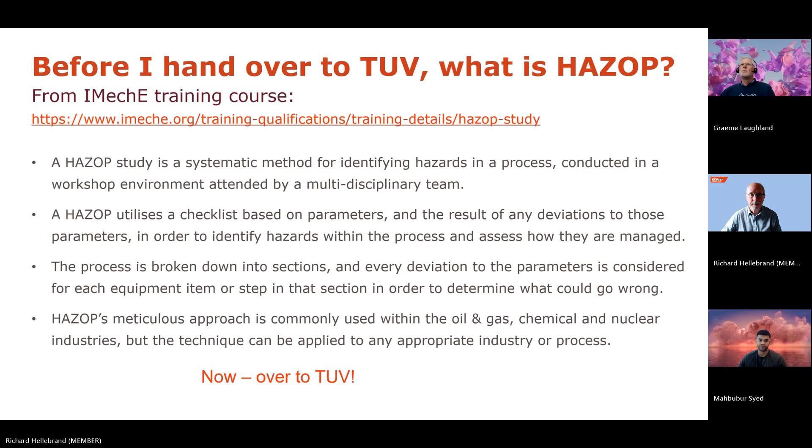I will cover the first part of the presentation. My colleague Mahbubur will cover the latter part. So who are these guys, I hear you ask? Well, I am a chemical engineer by background and a fellow of the Institution of Chemical Engineers. I am a professional process safety engineer as accredited by the IChemE. And that's probably best described as being akin to being chartered in the field of process safety.

I've worked full-time in process safety since the early 1990s. I've worked for 22 years at chemical sites, and these were always upper tier COMAH sites. I worked for 11 years at the Nylon Intermediate site at Wilton on Teesside, a facility very similar to Flixborough. Now, the Flixborough disaster was a major incident which occurred in 1974 and was a significant influence on the development of the Seveso Directive and today's COMAH regulations in the UK.

I've been a process safety consultant for the last 16 years of my career, and that's allowed me to get involved in a variety of industry sectors and operations, from offshore oil and gas, nuclear, petrochemicals, chemicals, pharmaceuticals, power generation, and the water industry. I led my first HAZOP study in 1989, and I've now led over 300 studies. The longest study I led was 34 weeks long, and the shortest one was less than 1 hour.

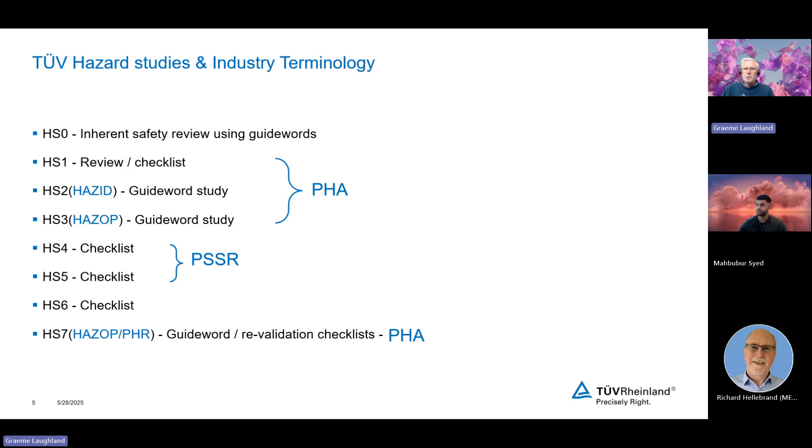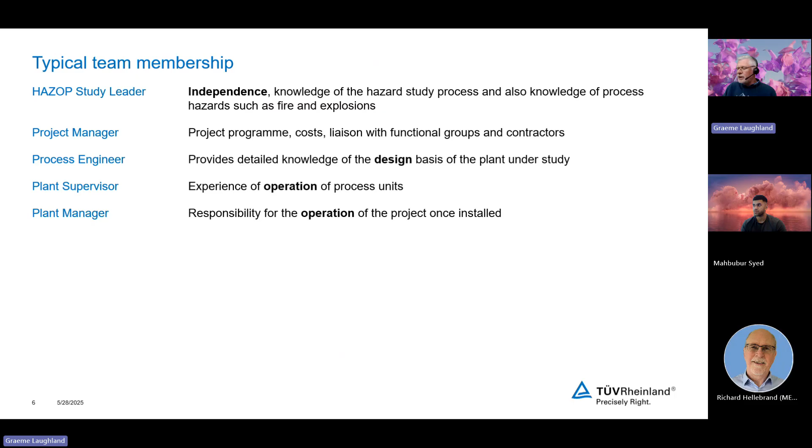So typical team membership, who gets involved, I hear you say? Well, this slide summarises typical team makeup for a project HAZOP. And it's key that the HAZOP study leader is independent from the project team. The leader not only needs to know how to apply the HAZOP methodology, but also needs to have the leadership and management skills to get the best out of the team. And believe me, if you have to do a study for 34 weeks, you've got to know your team.

In general, we need a mix of safety, design, technical, operations, and maintenance type knowledge. And as a mechanical engineer, you may be required to provide detailed information of the design basis, the maintenance requirements, and information such as the materials of construction.

Now, we can also bring in ad hoc team members. I recall conducting a one week long HAZOP with three representatives from a vendor. By the end of the week, the vendor advised that they'd learned more about their equipment in that one week of HAZOP than they'd had in the last 20 years of designing the equipment, because they learned so much from the operations and maintenance staff. So HAZOP is actually a fantastic learning opportunity.

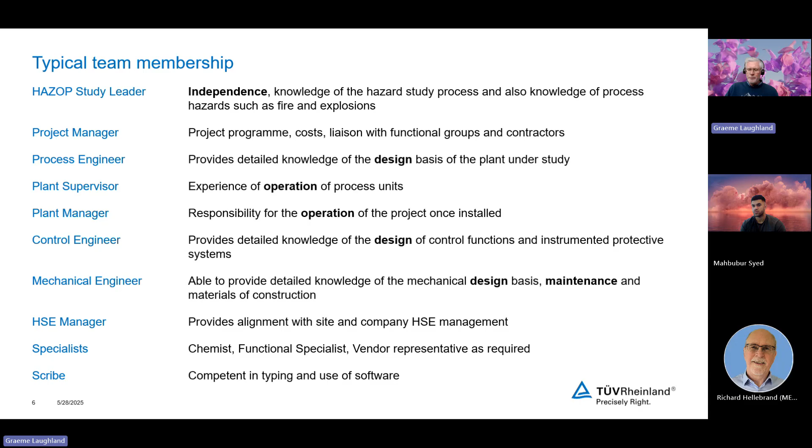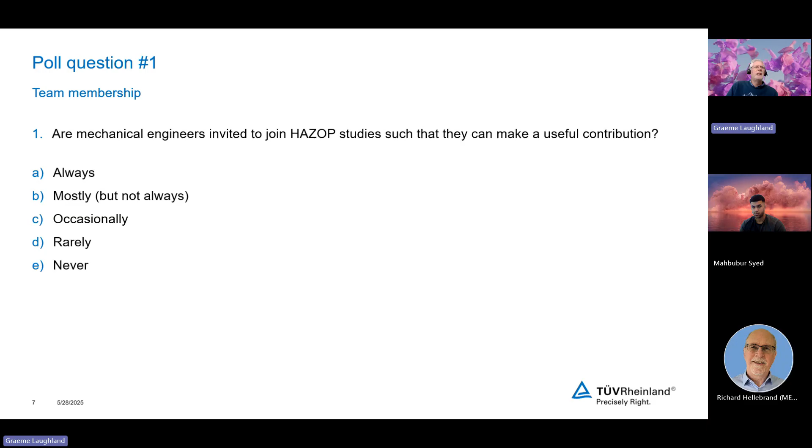Now that brings us to the first poll question. So the first question is, are mechanical engineers invited to join HAZOP studies such that they can make a useful contribution? A, always, B, mostly, but not always, C, occasionally, D, rarely, or E, never.

So I'm going to hand you back to Richard. Hopefully you can see the results there, Graeme.

Yeah. Okay, so the results have come in and they show that generally speaking, mechanical engineers are always or mostly invited to join HAZOP studies such that they can make a useful contribution. So that's around about just over 80%, 16% occasionally. So that's good news. That's the kind of response I was hoping for, actually. So that's great that we are involving people at the right stage. But however, if you're one of those who have never been involved before, put yourself forward and ask to get involved.

Okay, so back to the slides here again. So let's talk a little bit more about the methodology. What does the HAZOP methodology actually involve? Well, Graeme, I can't see your slides. Okay. Apologies for that. Yep, fine. Yeah, sorry.

Okay, so what does the HAZOP methodology involve? Well, at this point, I want to remind you that there are books written on this methodology, and I'm going to try and explain the methodology in seven key steps. First of all, we break the process into nodes. So we typically use P&IDs, break the process into manageable chunks, as we call them, into nodes, and describe the design intent and design limits of a small section of plant.

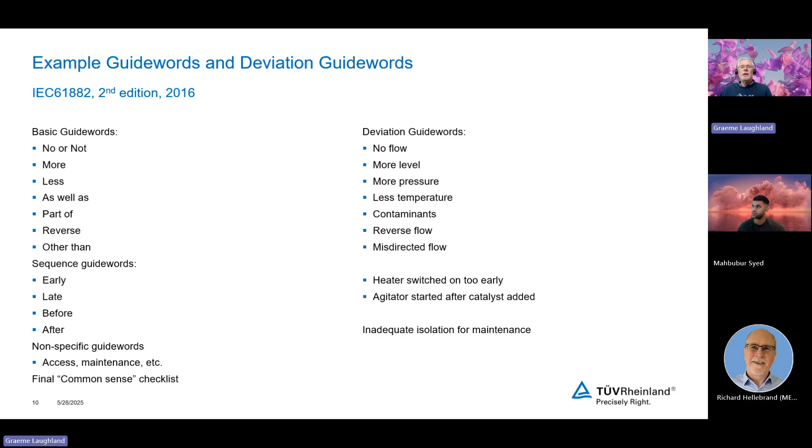So the next part of the methodology is to look at identifying causes of a deviation. And this is where the team brainstorm all possible causes of a deviation. And a lot of teams start with no flow. Well, you don't have to. For example, if temperature is what is being controlled in the node, I would tend to start with more and less temperature as deviation guide words. And sometimes going for the very obvious deviations just can help get the team started and off and running.

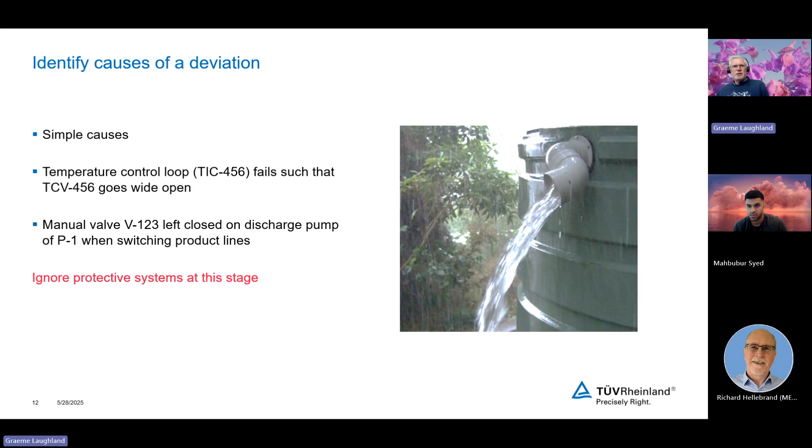Next step is to identify immediate and ultimate consequences. And a major failing of many HAZOP teams is to only consider the immediate consequence, e.g. the team stops the description of the consequences with vessel overfill, or worse still, demand on high level trip. So this is only part of the story. We really need to understand the ultimate consequences. Could someone be killed, for example? It's only by understanding the severity of the outcome of a loss of containment event that we can truly look at providing the most appropriate safeguards. And certainly when I look at some older HAZOP studies, this was a major failing of those studies.

Next, we need to look at our safeguards. We need to identify and review the protective measures. Now, what safeguards are there in place in the design? So it's best to think of the safeguards in the order in which the safeguards come into play. There's a logical hierarchy such as alarm, trip, pressure relief valve. We should also think of both preventative and mitigative safeguards.

Now, when a loss of containment happens, how will we know that this has happened? Will it take seconds, minutes, or hours to detect or observe a loss of containment? Will an operator observe a leak? Will gas detectors go into alarm? Will spillages be detected by effluent analysis? Or is it once someone's injured that we actually discover something's wrong?

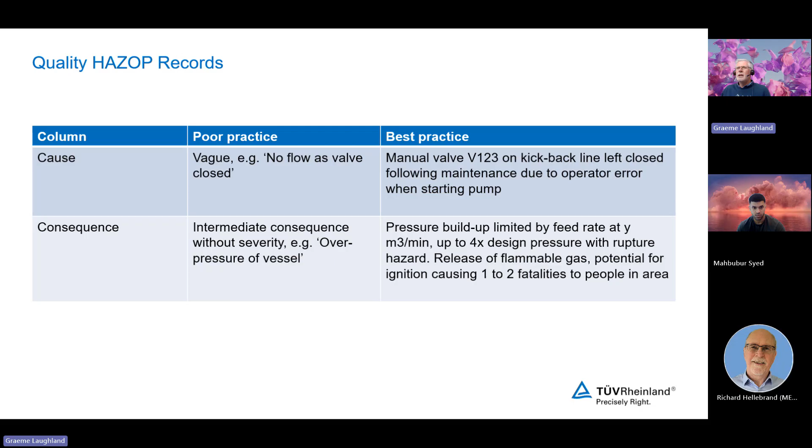So what do we mean by quality HAZOP records? Well, here's some really good guidance on poor and good practice recording. Best practice is to explain in some detail which specific valve is being discussed and why a valve may be left closed in error. The consequence description needs to explain the ultimate consequence. So tell the story of how the hazardous event unfolds. Explain how it happens in a sequential manner.

And in terms of safeguards, list them in the order that they come into play. That helps us think of reality and helps make sure that we have thought of all the relevant safeguards where we've got them. It's important we don't overlook safeguards that we do actually have. And where appropriate, we will highlight where there's a lack of independence, for example, an alarm and trip which may use the same sensor, because that may suggest we want to do something about that.